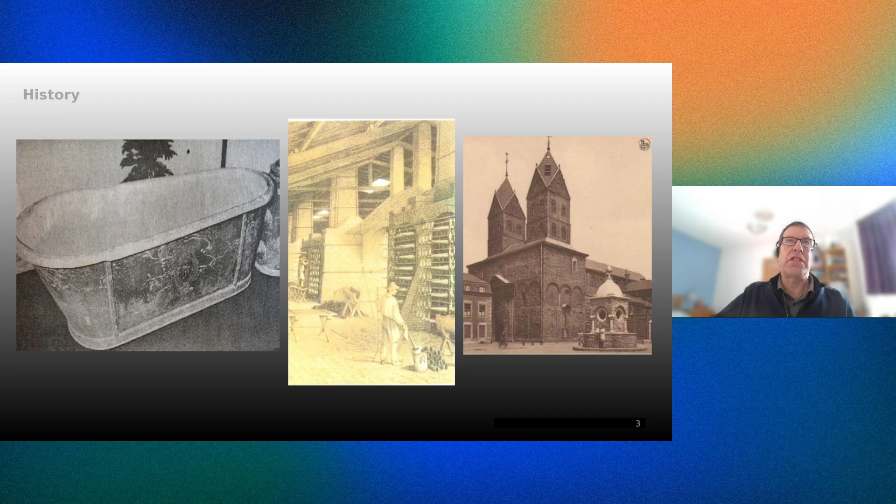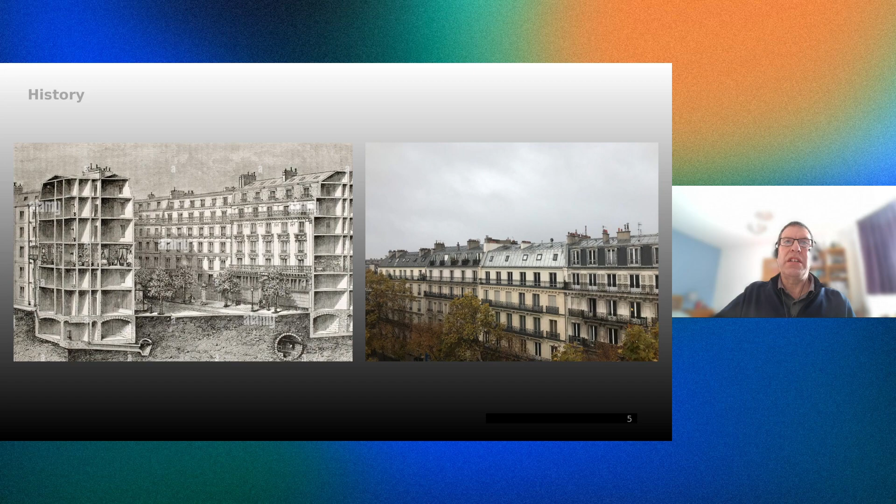On the left, you can see some of the drawings created at that time with the mansard roofs and grand boulevards. On the right is a picture actually taken last year. If you went to Paris in 1860 and you went now, you would see relatively little change. What we see and know of Paris in 2026 was really all built in the 1850s.

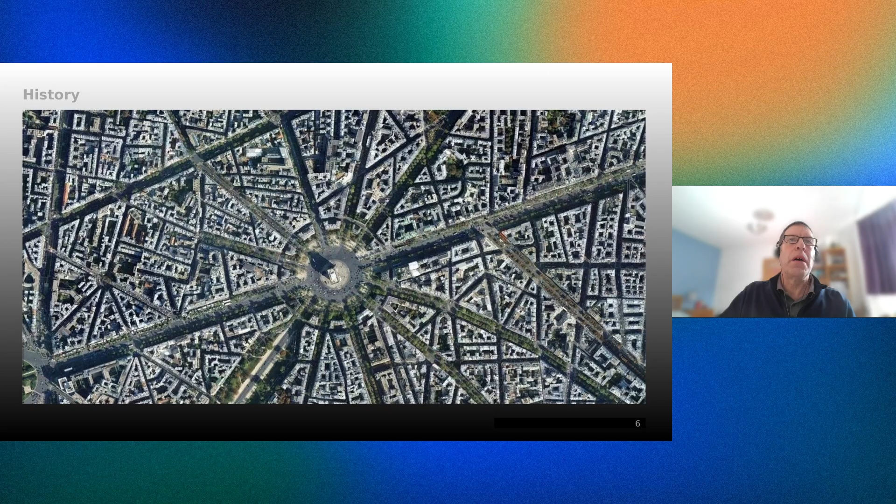This is a view from above of part of Paris—you might recognize it, that's the Arc de Triomphe and the Champs-Élysées. You can see there's a predominantly grey colour. That's because nearly all the roofs of central Paris are made from zinc, or at least have a significant amount of zinc on them, sometimes combined with slate. On the right is the Boulevard Haussmann, named after the town planner, and all those roofs are zinc.

I once went to Paris with a UK architect, and we were in this exact position—you can get to this place and look over Paris, from a shop called Galeries Lafayette. The architect said to me, 'I didn't realise there was so much lead used in Paris.' None of that is lead—all of that is zinc. A lot of it uses batten type systems, which we'll come to later, but all of it is zinc, sometimes combined with slate.

Some people ask, well, what's VMZINC? VM actually stands for Vieille Montagne, which means old mountain, the original mine where the zinc was coming from, now in modern day Belgium. That mine is long since shut, but the name of the company is VMZINC, and it was founded in 1837.

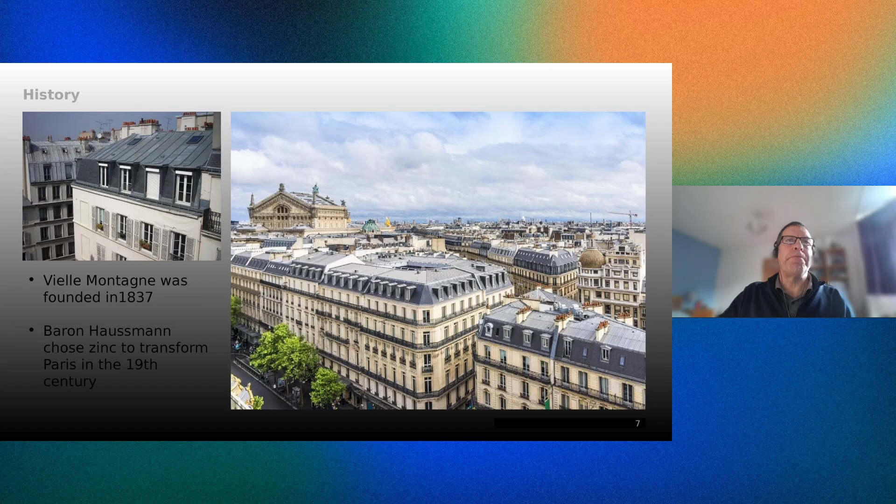This is something that happened in 2024. I'm sure everybody's heard of UNESCO. The zinc roofs of Paris weren't given UNESCO World Heritage status, but the skill of the zinc roofer and the zinc ornamentalist in Paris was given UNESCO World Heritage status. So the people that actually fit zinc have a UNESCO World Heritage status.

Whilst this is aimed more at Paris, I think all zinc roofers from all around the world can take a certain amount of pride in the fact that their skill has been recognized by UNESCO. And an awful lot of these projects, especially in Paris, are about retrofit.

The buildings aren't being demolished. They sometimes get slightly modified. Sometimes the roofs get improved insulation, and then zinc gets put on maybe after 70 or 80 or 90 years. We'll come to the durability in a minute. In fact, we're going to come to it now. So zinc lasts a very long time. Typically, the BRE give a service life of 100 years.

Now, zinc used to suffer from a little bit more corrosion, and you might ask why was that. Well, basically, the thing that really attacks zinc is SO2, acid rain. We have a number of environmental problems in the world today, but acid rain has actually been dramatically reduced over the years. So if you go back 40, 50, 60 years, corrosion rates for zinc were around 6, 7, or 8 microns per year. The thinnest sheet of zinc you'd use on a roof would be 700 microns, so it's still only 1% of the thickness per year, but it was significant. Today, we're down at 1 or 2 microns of corrosion per year for a 700 micron thick sheet of zinc. So corrosion rates have reduced dramatically.

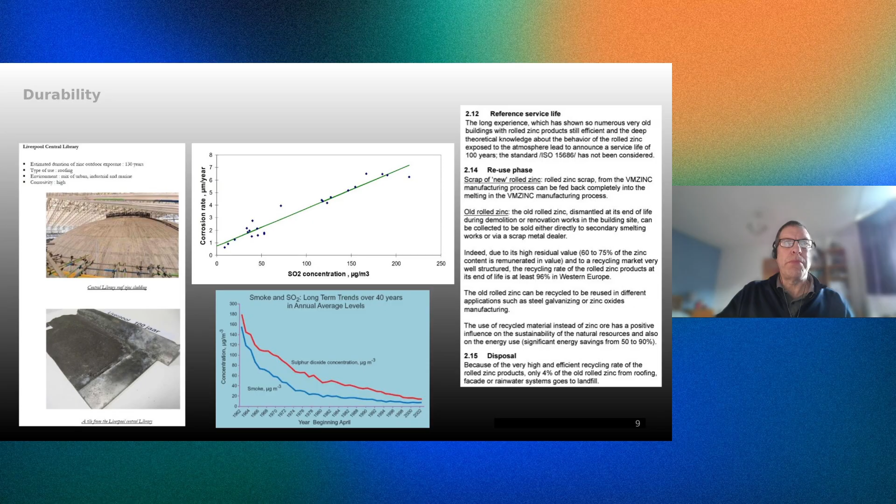This is a sort of first project to show you. It was done in 1879. This is Liverpool Central Library, which had a zinc roof installed in 1879, and it was replaced about 14 years ago with another zinc roof. Hopefully that's going to last into the 22nd century.

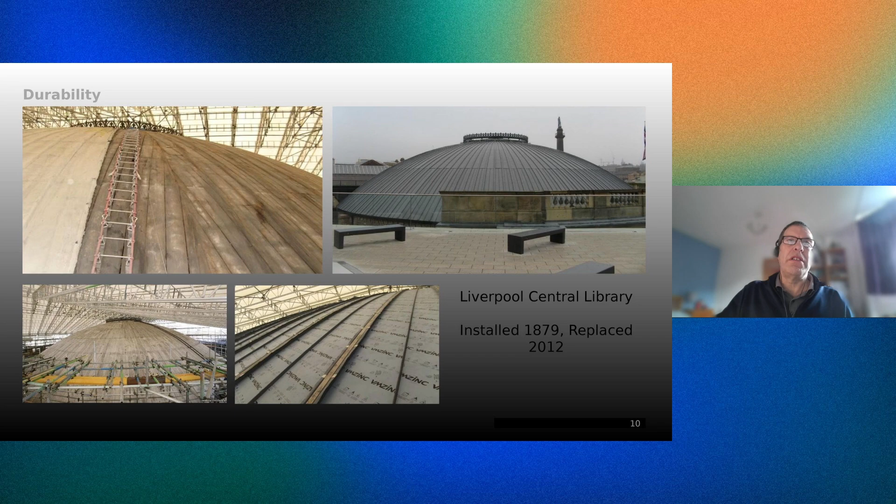Liverpool, when this was installed, was a pretty dirty place. A lot of acid rain by the coast, so a very aggressive environment. But the zinc did last 130 years. You can see on the left the Picton Reading Room, which is a beautiful space, and that's where the zinc covers that area.

There were some slight modifications made. English Heritage wanted it to go back exactly as it was done in the 19th century. Panel widths have been slightly reduced - there were less rules then, slightly more rules now. So we didn't recommend the 800 millimeter wide panels; we recommend they be reduced a little bit. Between the batten caps, we've added a standing seam, just to make it even more secure than when it was done originally, although that roof did last, as I say, 130 years.

I've mentioned zinc a few times. What we're using here is basically 100% zinc. It is not galvanized steel, it's not coated, it's zinc all the way through. However, we do add, for about every ton, 1,000 kilos of zinc, about 1 kilo of titanium and copper, and that slightly increases the tensile strength.

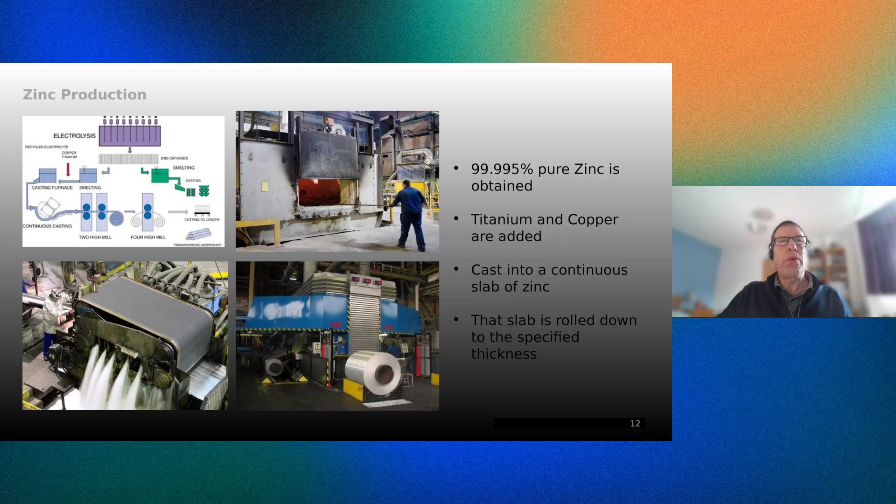The process involves putting the zinc and that tiny bit of titanium and copper in a big oven, and it comes out as molten liquid, then it goes into the machine in the bottom left, which is called a Hazelett machine, and it comes out as a slab of zinc. Then that gets rolled down to the thickness required, which is typically 0.7 for a roof, and then it can go up to 1.5 millimeter thick zinc for rain screen cassette panels.

Whilst zinc is refined, it does need energy. A lot of zinc is produced through electrolysis, and that's done at room temperature, so the energy requirements are a little bit lower than other metals, which is obviously good.

And zinc is never thrown away. About 96% of zinc is old zinc that is then reused. There's a very efficient recycling system for zinc. Now, some of it might go to being used for a zinc roof or a zinc wall, but other uses are brass, galvanizing, zinc oxide, zinc for skin cream. Zinc is an essential element. It's not toxic like lead, so you can put zinc on your skin. In fact, it's good for you.

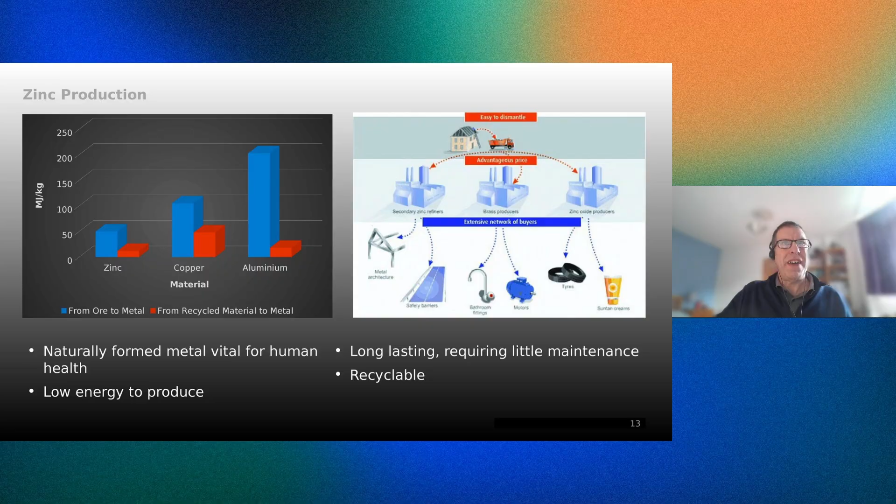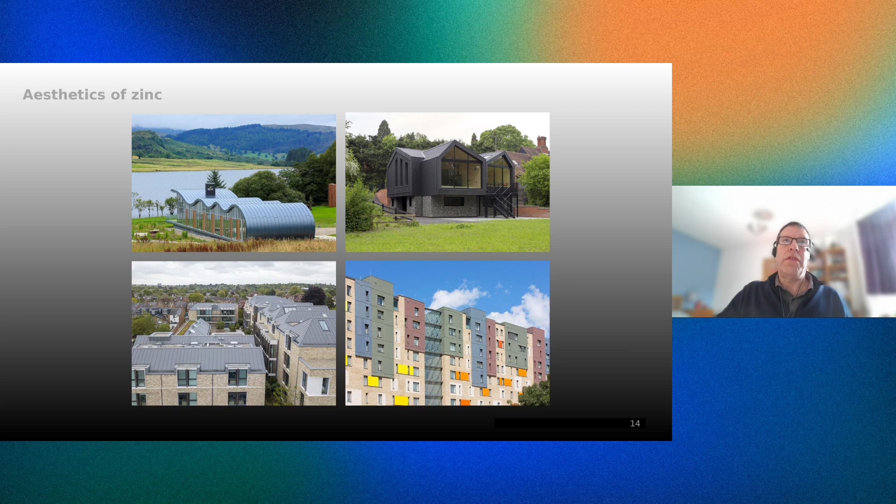A little bit about the aesthetics. This is one of the real reasons why zinc's used. It's an attractive metal. It's not a painted metal. It just has the beauty of zinc, whether that be for retrofit or new build.

You can use mill finish zinc, pre-weathered zinc, or even engrave zinc. There's a number of options to slightly modify the surface, but it is still absolutely solid zinc.

Natural zinc will form a patina, which will go to a middle sort of battleship grey, but it will take a number of years to create a completely uniform patina. So after a few months or maybe even a year or two, it might be a little bit uneven, which might be fine for some clients, but not for others.

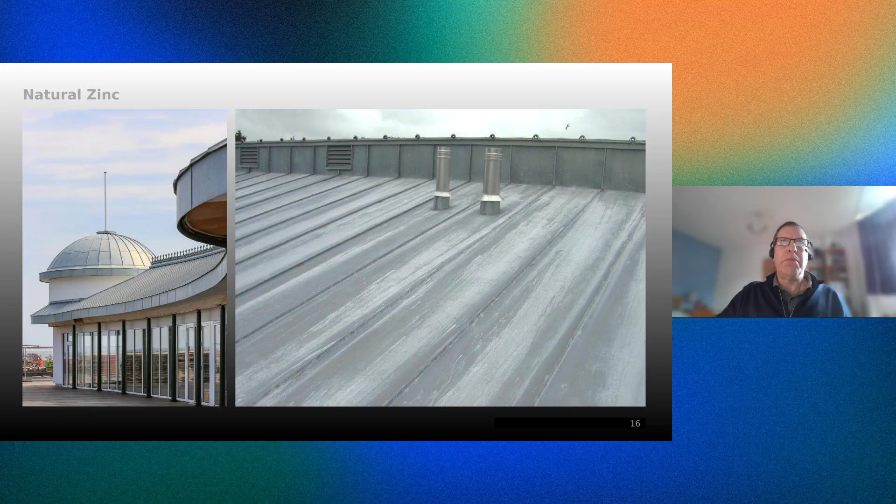And that's where we have the pre-weathered quartz zinc, which is basically doing what nature does, but from day one. So it's this middle grey from the beginning. All this can be used, whether it be roofs or walls, or as you can see there, rainwater systems. The quartz zinc can be used for that.

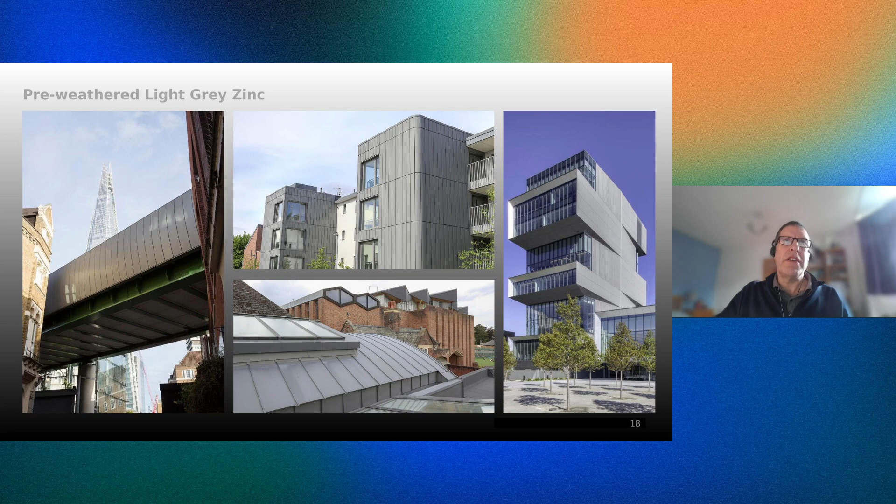Here's a few examples. There's Borough Viaduct with the Shard behind it. In the middle, top, is actually some housing in Dublin - that's a renovation using rain screen panels. A school in Stockport that was extended, so a large extension. And on the right, a university building in Chicago over in the US.

The first pre-weathered zinc that we produced was Anthrazinc, which has a very similar aspect to slate, and that was first produced in 1979. So it's been around for almost 50 years now, and it was originally used as a flashing material for slate.

Installers used to paint the zinc because clients didn't like the shininess of it. The problem with painting zinc in situ is that the paint peels off, doesn't look great. Architects asked us, could we pre-weather zinc? And we came up with this in 1979, initially as a material just to be used with slate, flashings, gutters, and that sort of thing. But over the years, it's become a material in its own right for roofs and walls.

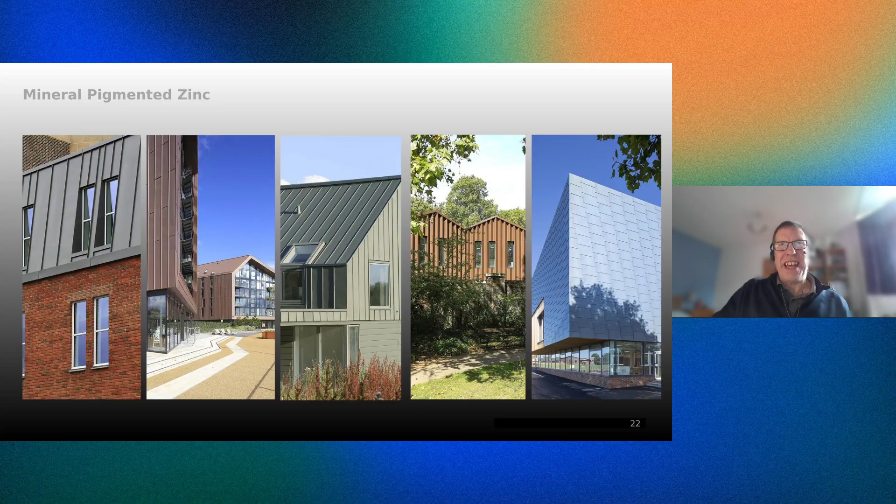Then there's Pigmento, which is zinc that has a mineral pigment added to the pre-weathering. It's a little bit like looking at zinc through tinted glasses - you can still see the texture of the zinc. They're not bright, vibrant colors, they're fairly discreet. And you can use them for all the systems, whether it be roofing, wall cladding, standing seam, rain screen - it doesn't really matter. All of those are possible in the Pigmento range.

This is a project done over 10 years ago, Godson Street near King's Cross, Islington. It's very accessible and shows zinc that's been up for a number of years in lots of finishes. So if you are in London and want to see zinc in lots of finishes all at once, this is a good place to go and have a look.

And we're always extending the finishes. This is the same principle, slightly darker, so dark zinc with a very slight red colour and with a very slight blue colour. We've even done bespoke colours - this is on Oxford Street in central London.

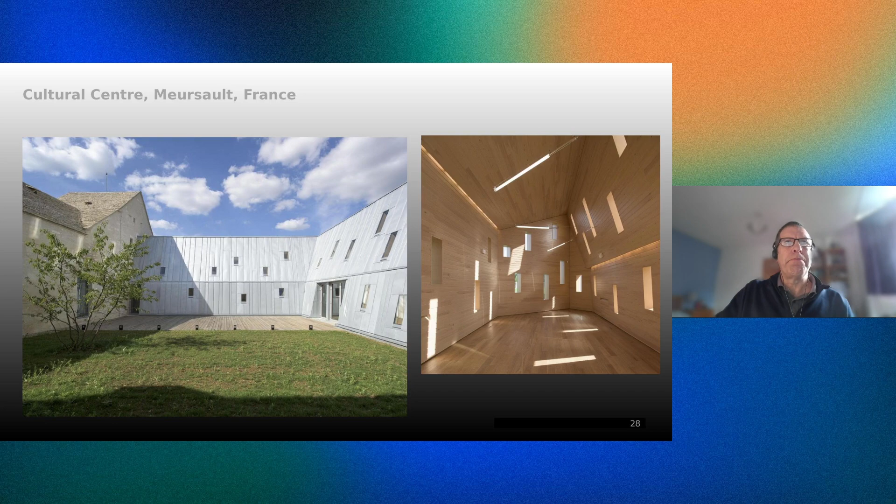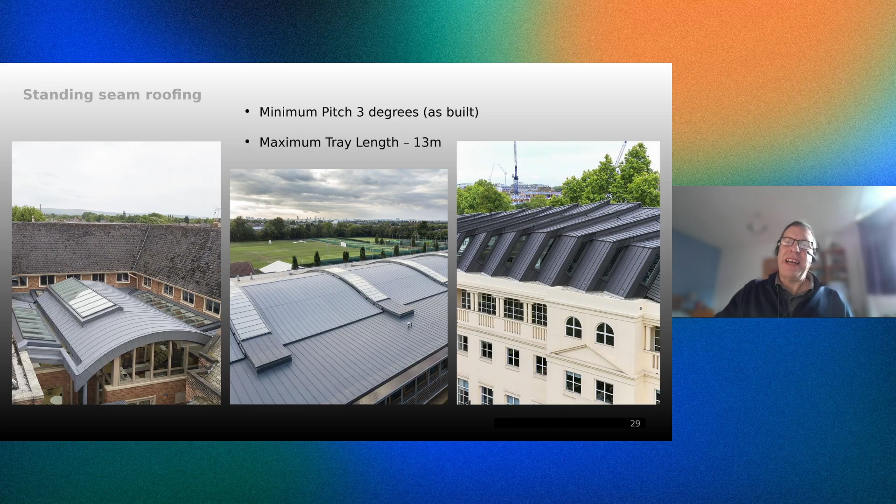So zinc can be used for roofs and walls. Standing seam is really what's mostly used for roofs. We did mention batten cap. There is a minimum slope of 3 degrees and a maximum length of about 13 meters. Metal, including zinc, expands and contracts, and beyond 13 meters that gets difficult to manage.

Talking about standing seam, we're talking about a 25 millimeter standing seam. It's a fairly discrete seam - not an industrial sort of rib. It doesn't have stiffeners, so it's quite a discreet panel.

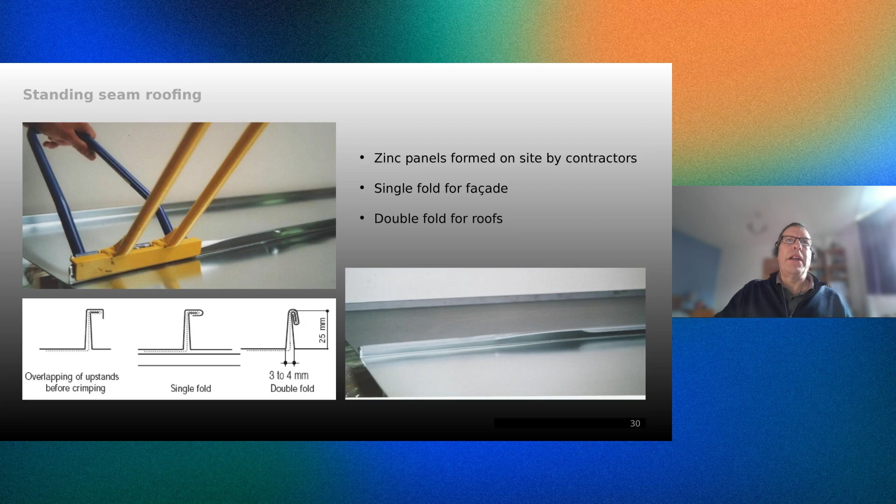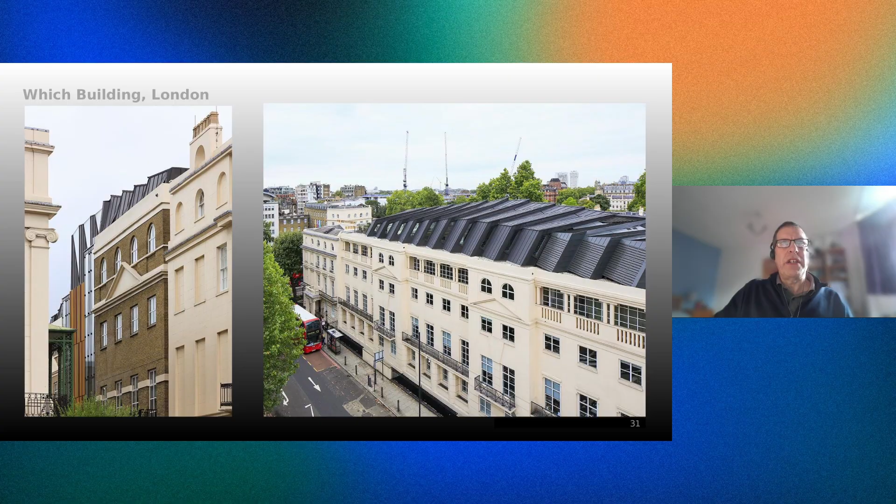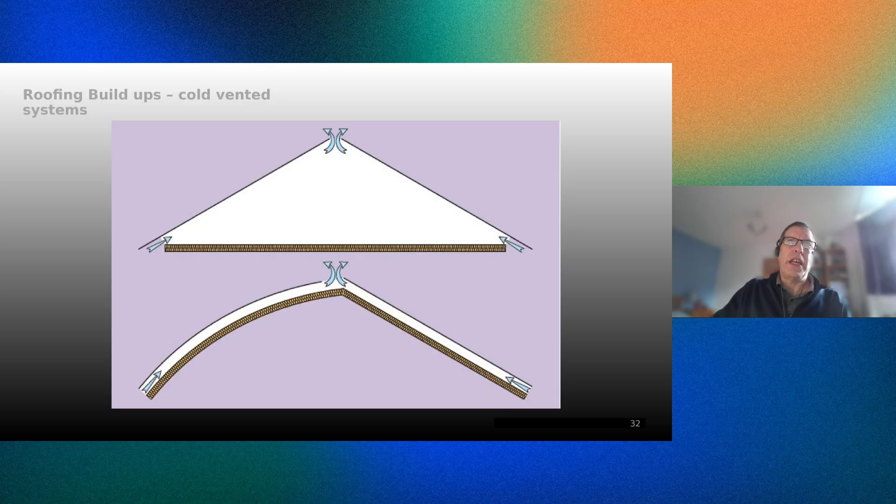Just a word on build-ups. Both cold roofs and, as you're going to see, warm roofs are possible in zinc. Cold roofs are where the exterior skin is vented - there's a space between the insulation and the exterior skin, whether that be at roof level or loft level. It doesn't matter. These are vented roofs, and that's typically the build-up.

You'll see there'll be zinc sitting on quite often timber. There are other options with a vented cavity underneath. The vented cavity is not to deal with water ingress from the outside - it's to deal with condensation from the inside.

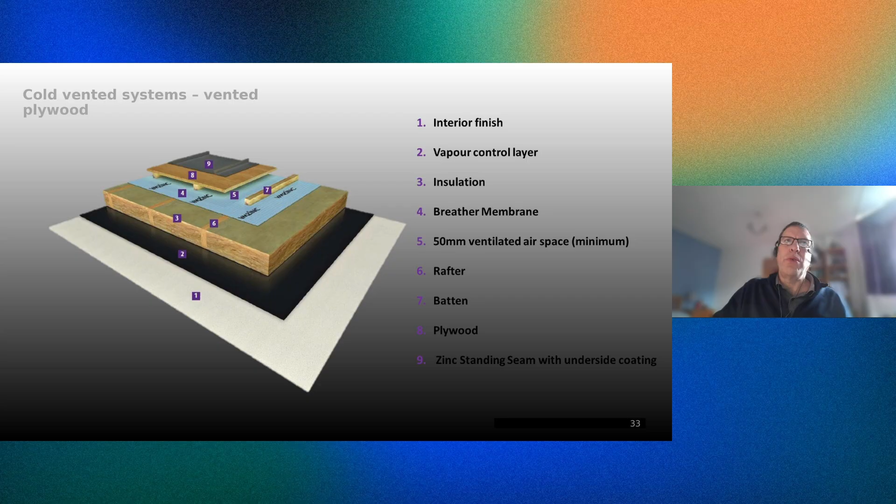And a warm roof is possible. This is where you have your insulation above the structure, hence the term warm roof. Typically the zinc is sitting on insulation. So you'll have your structure, then a vapor barrier, which is absolutely fundamental.

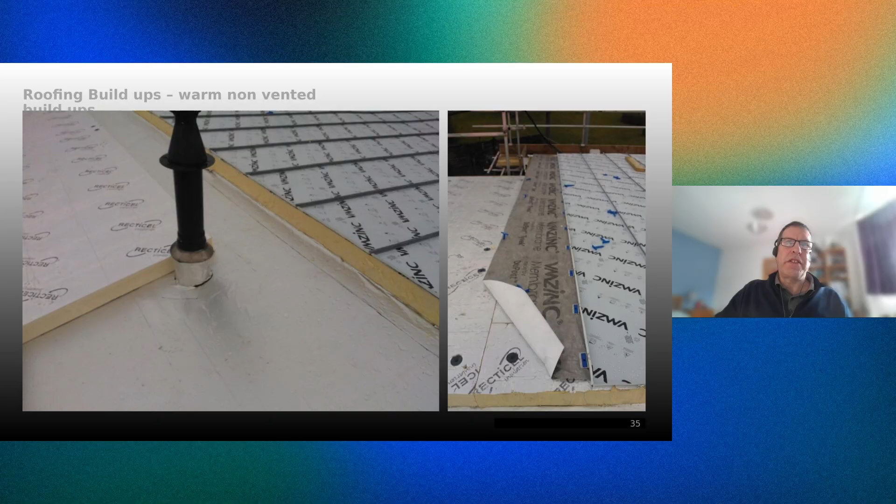It has to be an aluminium bitumen backed vapor barrier, not a VCL, not a polythene film, then insulation, breather membrane, and then bearing plates - stainless steel bearing plates with the pegs that go through and fix the zinc back to the structure below with a very limited thermal bridge. There's a number of options, including ones that have a BBA certificate.

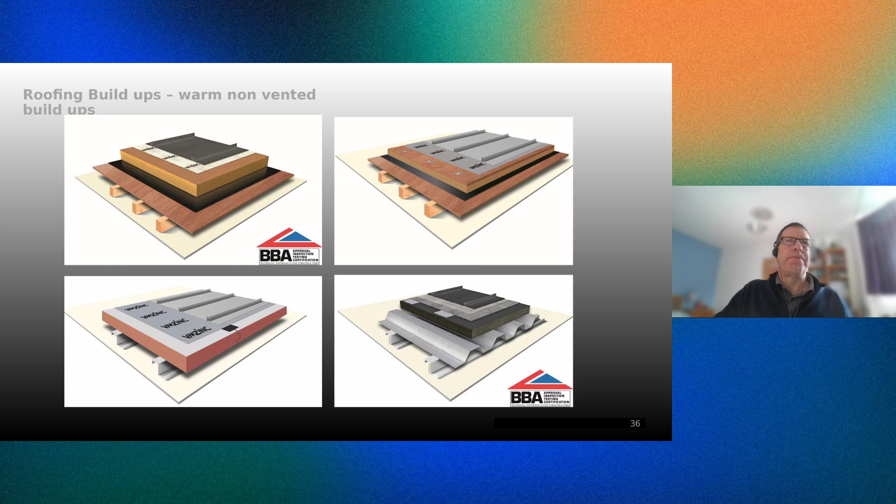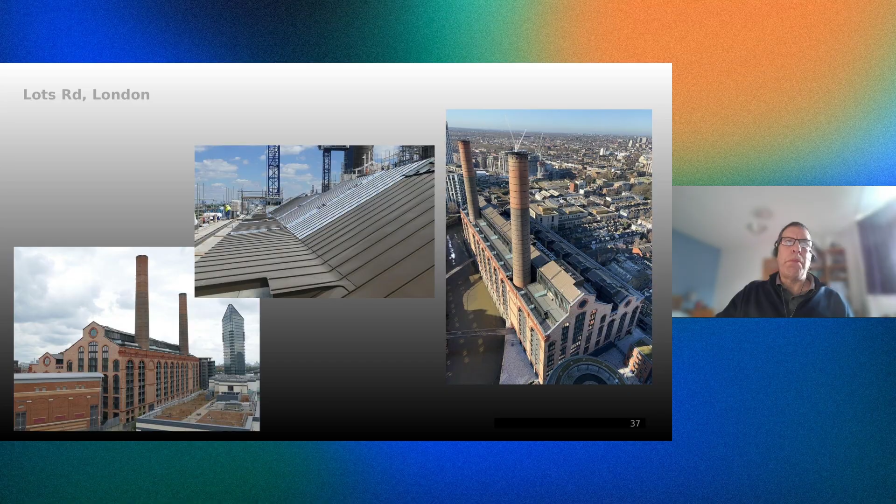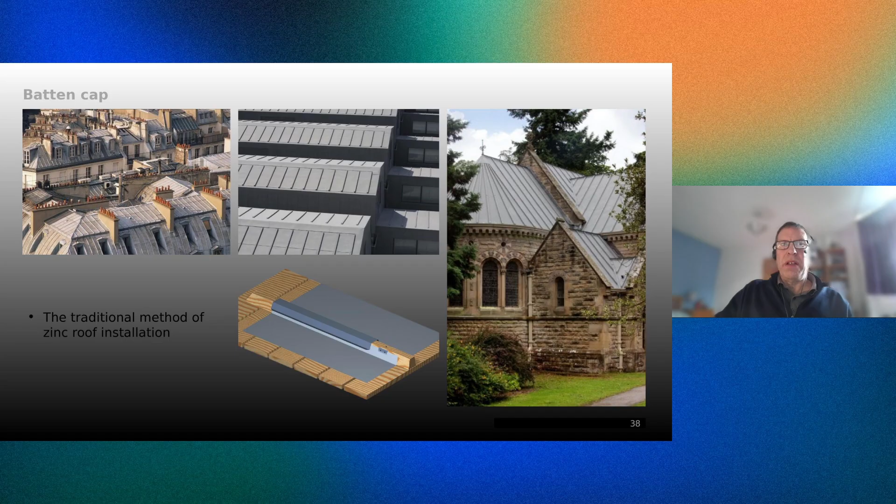I mentioned batten cap a few times. On the right is an old church that was re-roofed with a zinc batten cap roof, near Shrewsbury. A batten cap is very similar to a lead roll, so it's a U panel with a timber batten and then a flashing over the top.

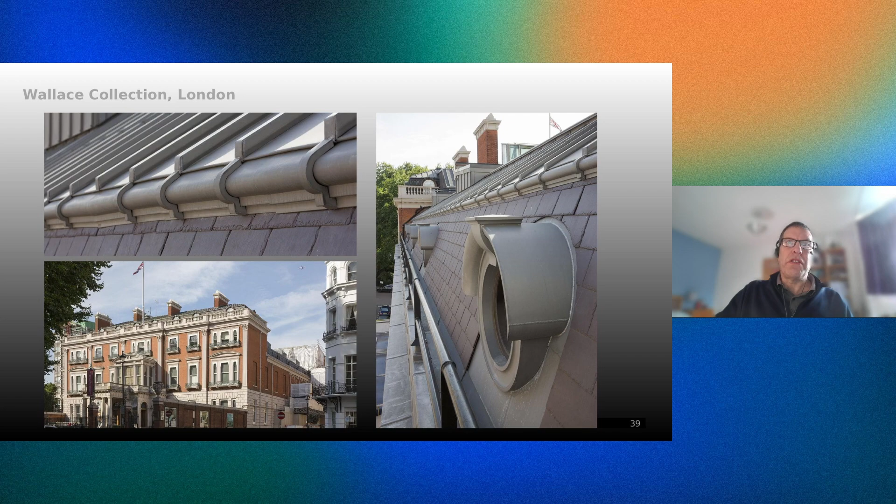This is the Wallace Collection in West London. Again, quite an old building, combined a little in the Parisian style - a mansard in slate and then a batten cap zinc roof on top, with ornaments in zinc, and you can see the bullseye window there in the quartz zinc.

Oops, sorry, jumped for a bit quick. Just going to go back to where I was. Right, so just moving forward now.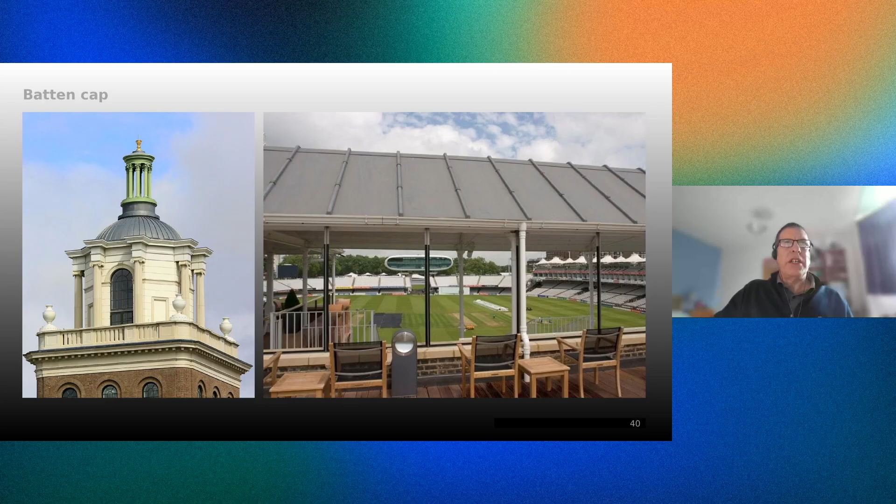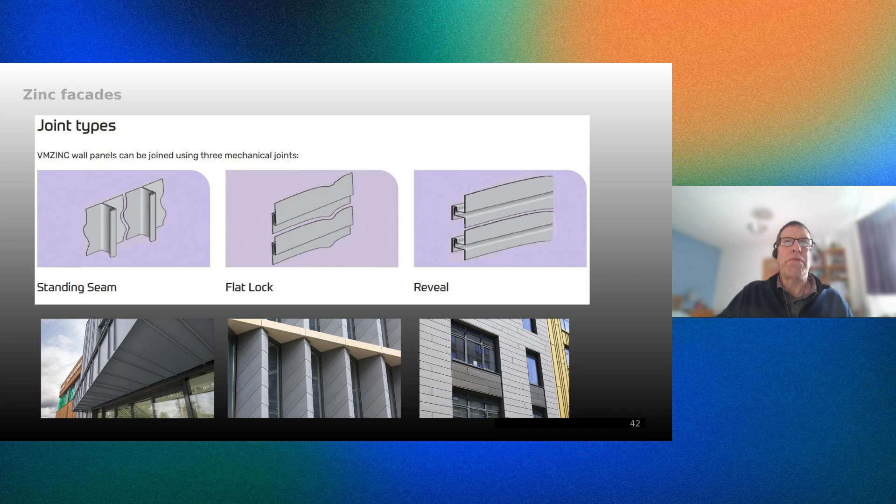Now on facades, there are lots more options of panels, including rain screen panels. Standing seam facade isn't a rain screen, but there are rain screen options. Typically you'll have three types of joint: the standing seam on the left, a flat lock type joint with two hems locked together, and some sort of reveal type joint, more commonly used with rain screen. The standing seam on a wall is really a roof on a wall, and that can be fitted to plywood.

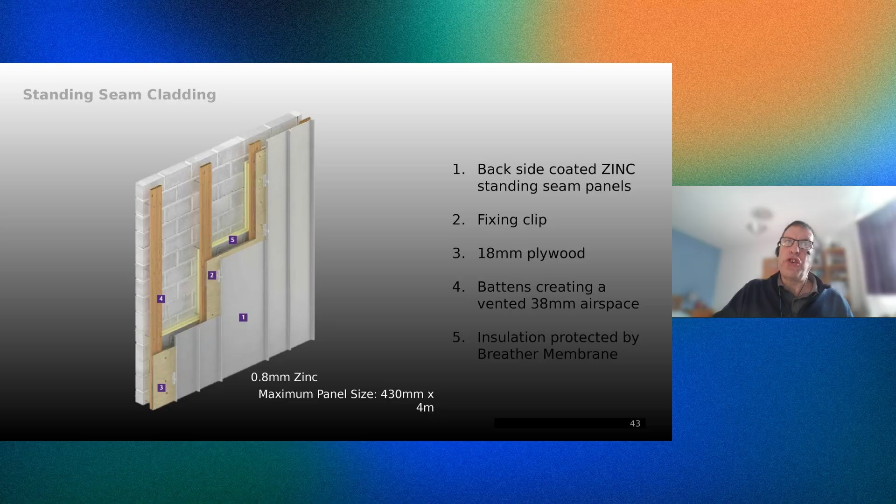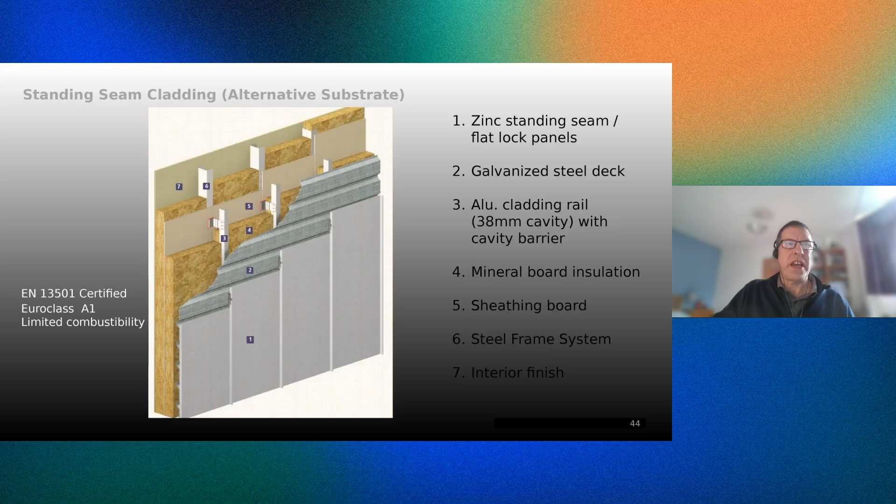The zinc itself is A1. All finishes are non-combustible A1, but it is possible to replace the plywood with a steel deck, taking anything combustible out, using maybe only A1 and A2 materials, but the zinc itself is A1. There's an image showing the steel deck before the zinc's applied. Obviously, zinc and galvanized steel are completely compatible, since galvanized steel is just steel covered with zinc, so there's no compatibility issues there.

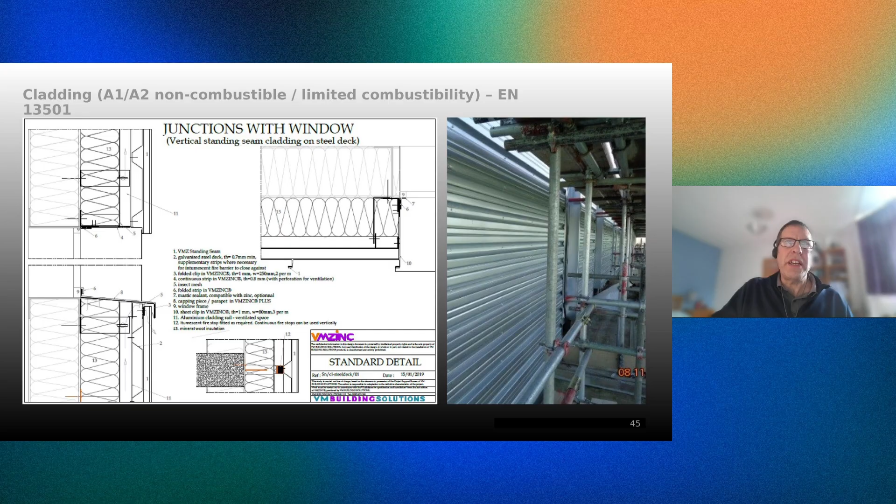As far as widths are concerned, maximum 600, that's really for roofing, and 430 for more wall cladding, but you can play on panel widths, as we've seen on other projects, to give the facade even more texture.

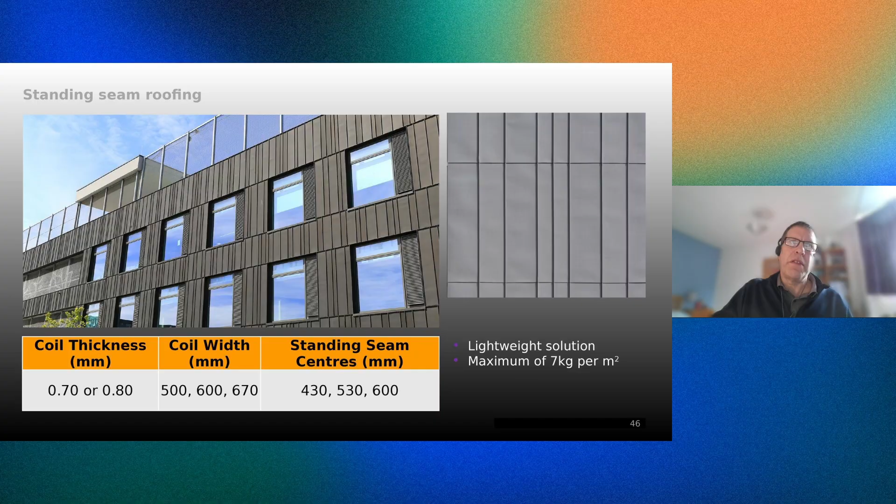And the flat lock panels, as I said, are really just panels with 25mm hems that are locked together, and that can be rectangular, diamond shaped, square, but they're all essentially flat lock panels.

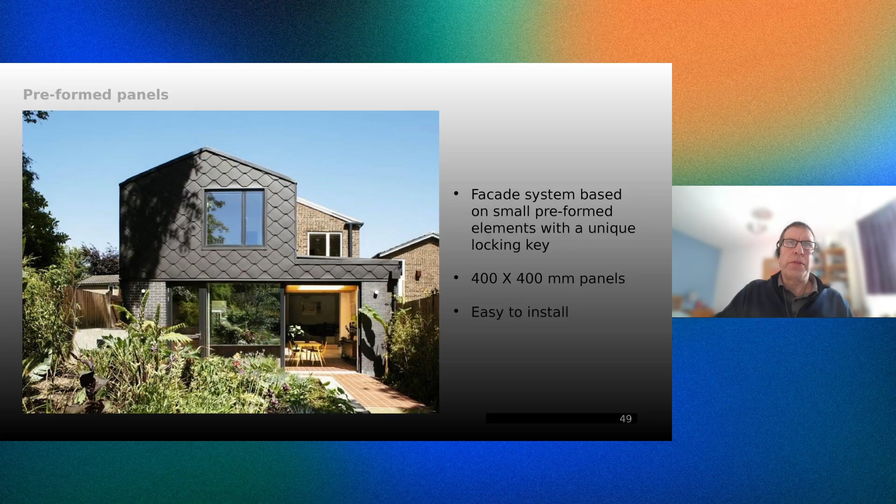This is a stamped shingle called Attica, and here there's an extension being done on a domestic property, creating quite an elegant extension.

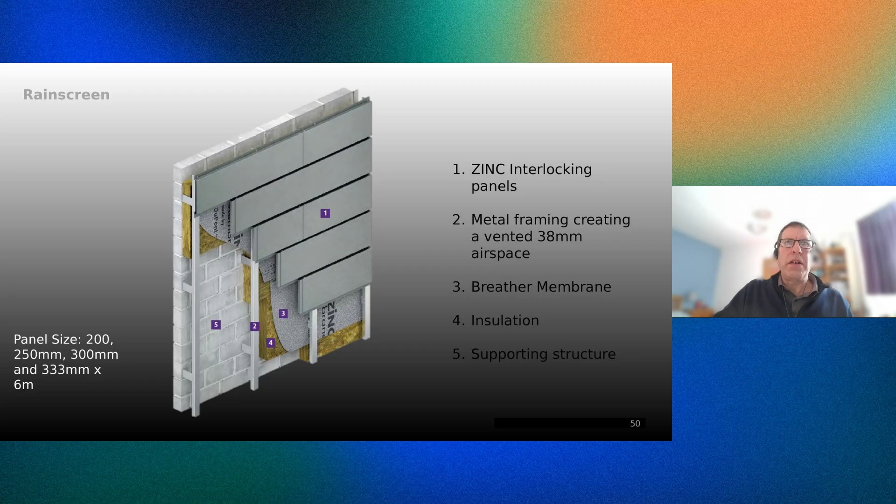I've mentioned rain screen a few times. Rain screen is really where water can ingress through the panels, which is fine - there's a cavity and it can drain out at the bottom. The interlocking panel is probably the most commonly used rain screen panel.

Sine wave - obviously we haven't invented sine wave or corrugated, it's just corrugated zinc. This is one of the few systems where you actually fasten through the zinc and the fastener's visible, so it's absolutely fundamental that's a stainless steel fastener.

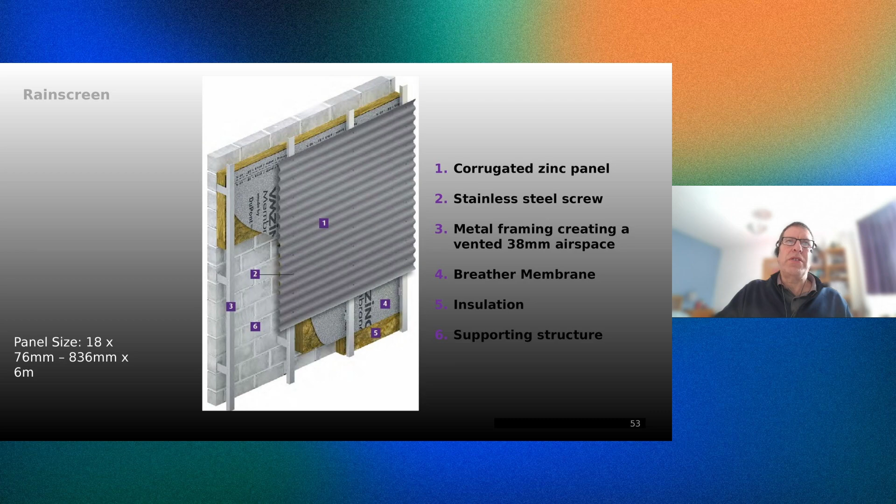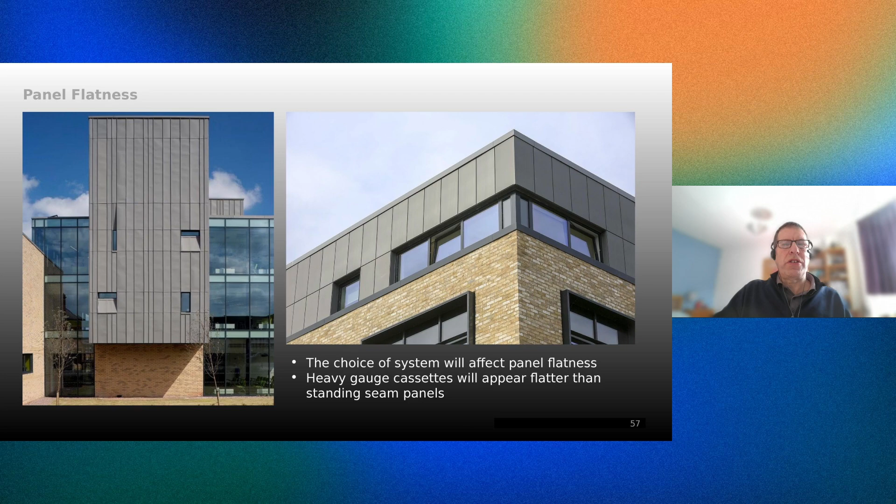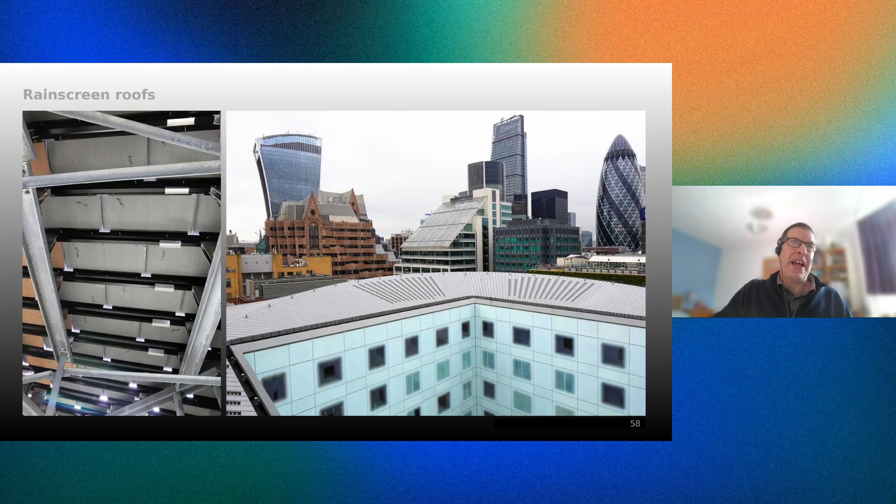This is the Port Authority building in London. Again, this photo was taken a few years ago because a view of a few towers have since been added to that view between the walkie-talkie, the gherkin, and the cheese grater. This was an old Port Authority building - I think it's a hotel now - and a rain screen roof was created on the top.

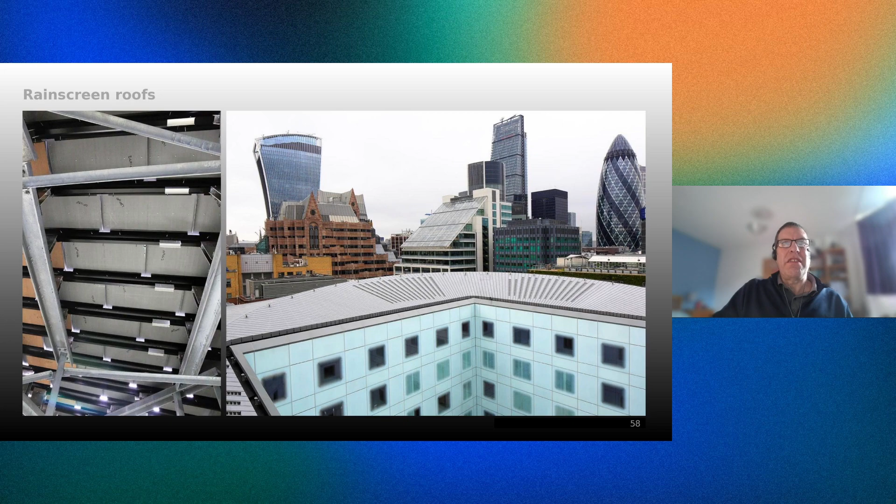A rain screen roof means that the water can penetrate through, and on the left there all those black lines are effectively gutters. So it's quite a complicated roof, but it's quite interesting.

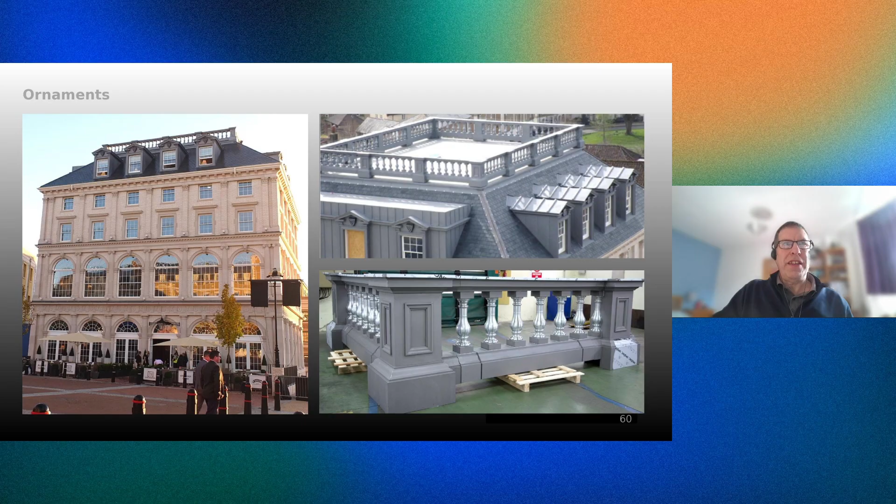Mentioned weight earlier - this is Poundbury. I won't get into the pros and cons of Poundbury, but the project does show a balcony balustrade, which was initially going to be stone, but when the architects were looking at doing the dormers in zinc, they saw that we could do quite a lot of interesting things with zinc as far as folding it, spinning it, soldering it, and create a balcony. The advantage of the zinc is it's far, far lighter, making quite a significant saving on the roof structure.

And zinc gutters - sometimes we see projects with a lovely zinc roof and then a PVC gutter, which is a little bit sad. You can use the same gutters, whether they be half round, rectangular, or internal gutters, with all the accessories, the end caps, the elbows, and so on and so forth.

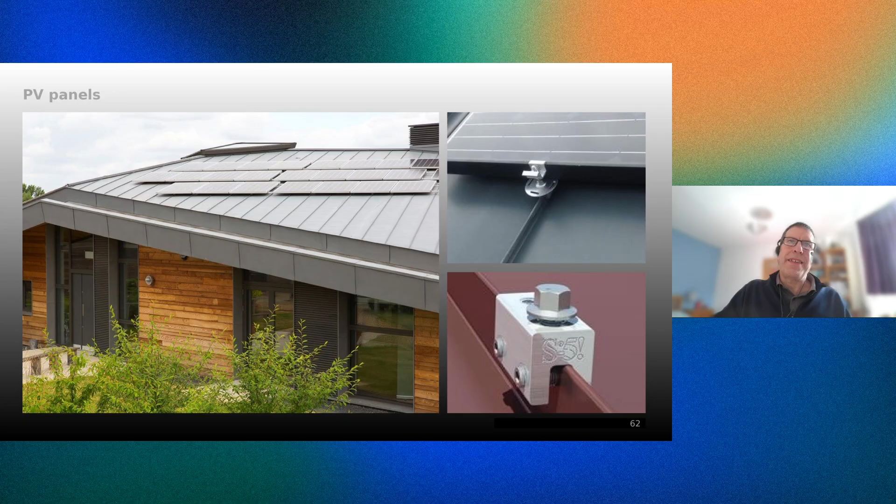And it's possible to clamp on PV panels. This can obviously be done on retrofit, but also on new build. Panels can be adhered to the zinc. The clamp-on system maybe makes it easier to add and to remove. The only issue is we do need to look at the shear stress. If you're clamping something onto the standing seam, you need to make sure that standing seam is not being put under too much load, and that's something that we can look at for you.

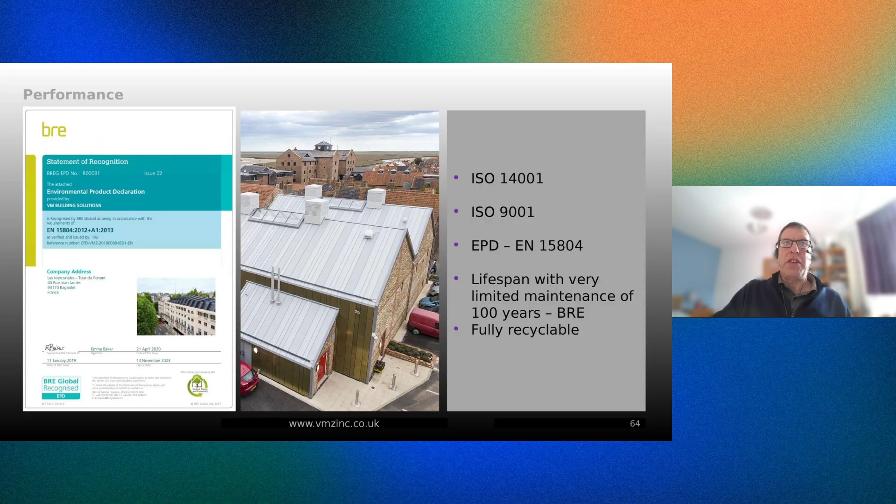As far as certification goes, plants are ISO. We also have EPDs for all the finishes, and as I mentioned earlier, the BRE state a lifespan of 100 years with limited maintenance, and it is fully recyclable. We've also done a number of BROOFt4 tests showing no flame penetration or spread, and as I said, the material itself is A1.

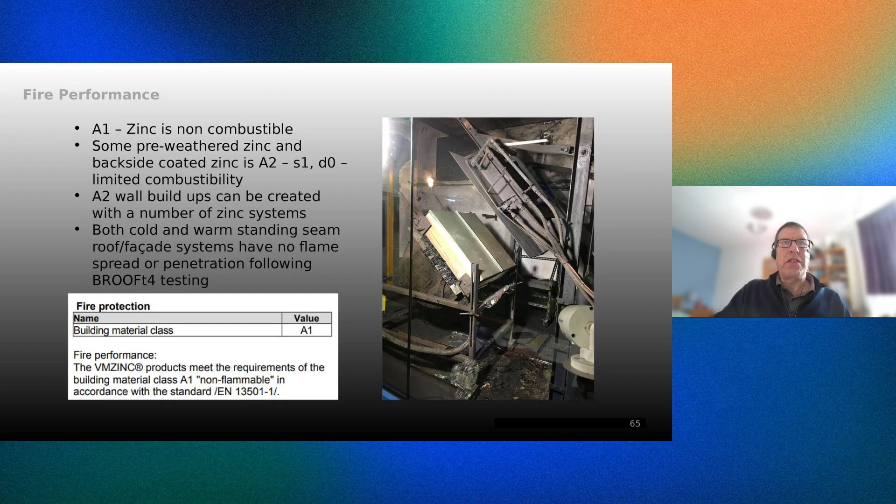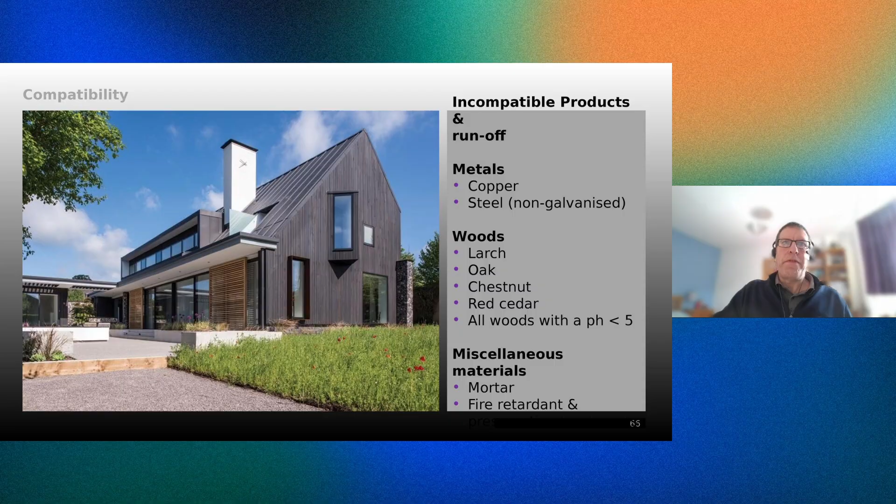Zinc is not compatible with everything. As far as metal is concerned, the big thing to avoid is copper. If copper's beneath the zinc, there's not a problem. Some very acidic timbers can stain zinc - again, if they're beneath the zinc, it's not a problem. So if you are doing something where other materials have been used and the water's going to run across the material onto the zinc, maybe have a chat with us and we'll let you know if it's going to be okay.

This is not a retrofit, but it's an interesting project, or two projects, both in New Orleans. This is going back to 2005 and the Katrina disaster, where there was a significant hurricane and flooding. The panels on the left are interlocking panels, which had pretty much no damage at all. On the right, standing seam - you can see that the windows have been blown out and the flat roof has been peeled off, but the zinc resisted extremely well. So it actually has been hurricane tested.

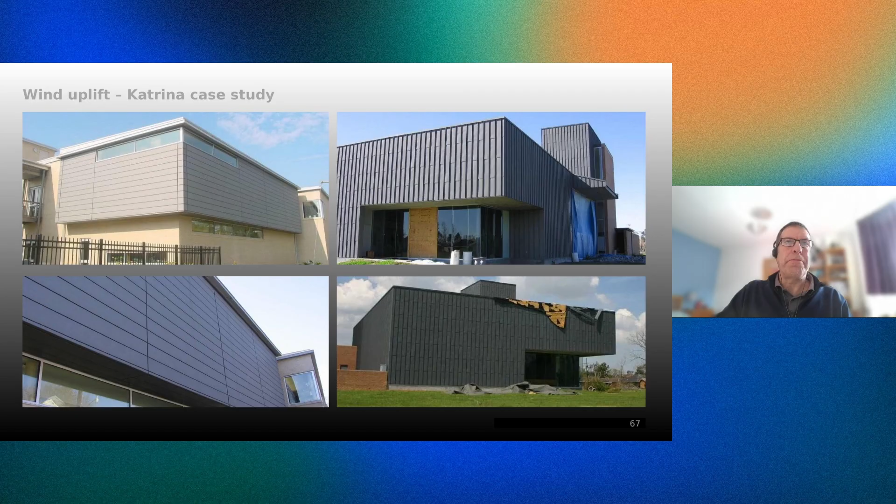All of the zinc that we sell in the UK is made in France, but it's stocked in the UK, so it is available. Price does depend on complexity, the nature of the project, the size of the project, the location, and a number of things, but sort of between 125 and 225 pounds a square meter supplied and fitted is what you'd expect. Now that means the panels, the installation, not the substrate - so not the insulation and the timber or metal - but the zinc panels supplied and fitted, sort of between 125 and 225 pounds a square meter, but it will vary depending on project.

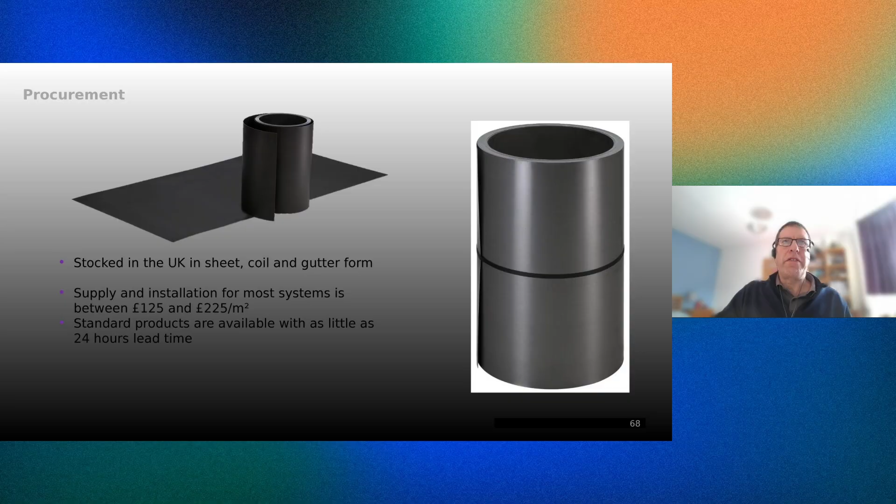James mentioned the importance of installers. Zinc standing seam and facades shouldn't be installed by general builders. There is a network of installers around the country, and in particular VMZINC At Work partners, of which there are 65 across the country. These companies understand all our recommendations, the nature of the flashings, the build-ups, cold roof, warm roof, panel size, and they can also offer a 50-year material warranty on the projects.

I mentioned UNESCO. I think it's important to stress that we sometimes criticise trades in the UK, saying they're not as good as Germany, Switzerland or France. There are undoubtedly people doing things they shouldn't be doing, but there are also very competent, well-trained companies that spend time and money on apprenticeships. So there are some excellent companies.

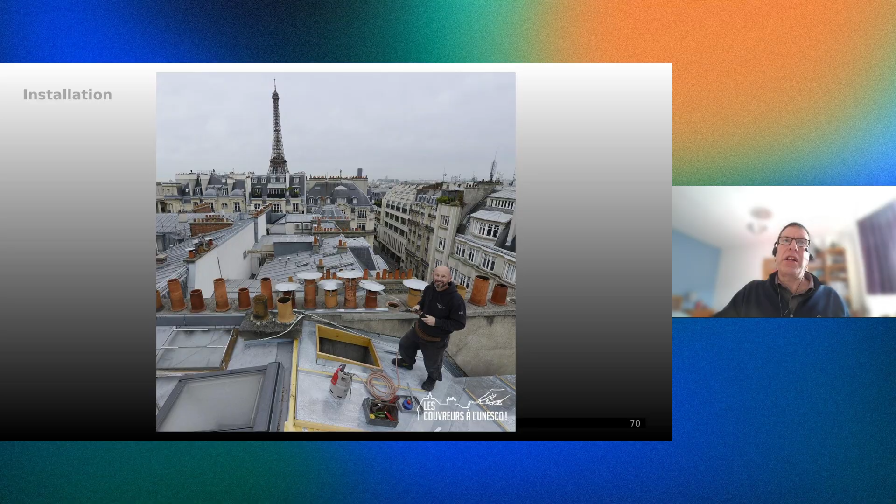As I said, we have a list of 65 companies across the UK and indeed Ireland, VMZINC at Work. We have a further 65 or 70, so getting up to about 140 companies in total. The other ones are recognised, so they also have knowledge of fitting VMZINC.

Going back to the biggest retrofit, Paris. If you watched the Olympics back in 2024, a lot of the events had a backdrop of Paris, and therefore you would have seen lots of zinc, whether it be the quayside of the Seine or a high level view. You would have been looking at lots of zinc in those images.

We can supply a lot of information, whether it be literature, samples, NBS specifications, BIM. We have a large library of CAD drawings, and obviously we can do face-to-face discussions about specific projects. That's something we're very happy to organise. So please let us know, contact us if you want us to talk about a specific project.

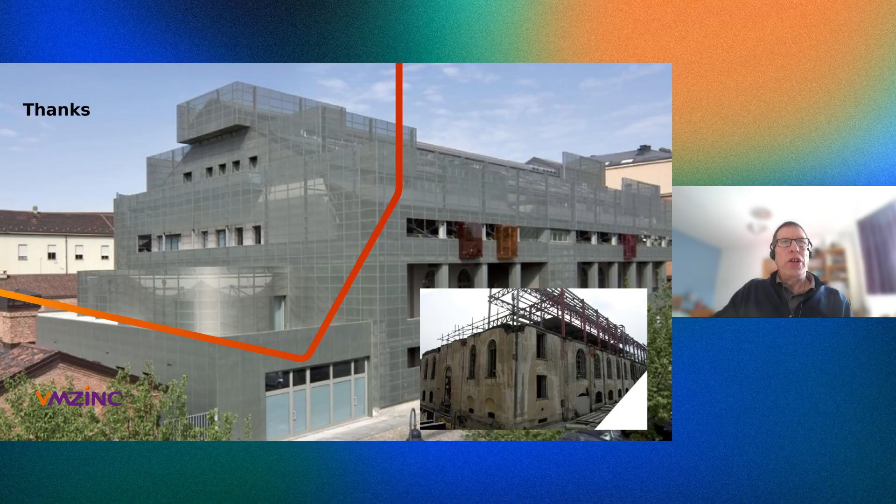That's a project, actually, an old army barracks in Turin that, as you can see on the bottom right, was a little bit the worse for wear, and it was massively renovated, and then around the whole of the building, a perforated screen was installed using zinc to give it an ethereal type feel, take away the image of a barracks. The nice thing about zinc is when you perforate it, you're just exposing more zinc, not exposing anything else. It's just zinc. So that's pretty much finished.

But before I go, I do want to mention that for the last 2 years, we've been able to offer copper. Now copper and zinc, as I mentioned, don't actually get on with each other as far as compatibility, but they are designed and installed in very similar ways. Copper's red, zinc's grey, but the techniques and systems are almost identical. So what you can do in copper and what you can do with zinc are very similar. And as with zinc, there's a number of pre-weathering treatments we can do with copper, including artificially creating copper that looks green.

Right, that's it from me. I'm going to hand back to James for hopefully a few questions. Thank you very much.

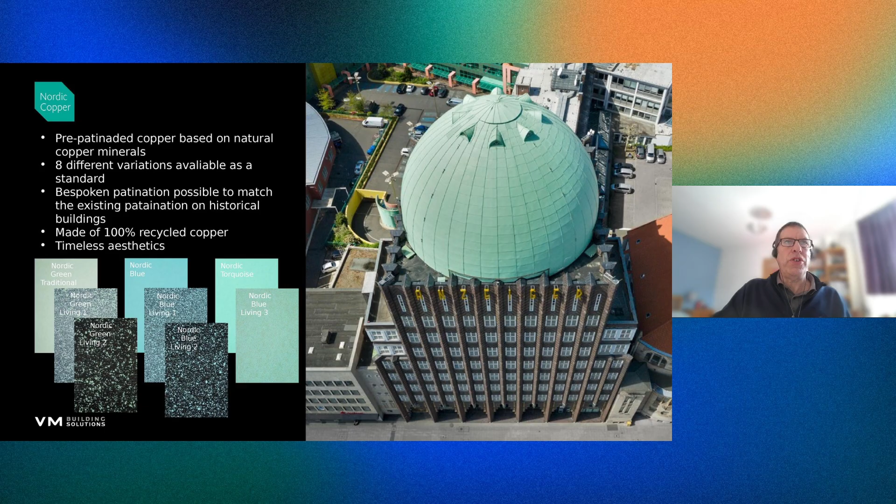Thank you so much, John. What a great, elegant, understated material zinc is, eh? Very popular with architects, as we know, or many.

It's interesting you've moved into some new shades there with the copper side of things, but we're going to stick to zinc, and we've got some practical questions which have come in, which is very helpful. You have talked about roof build-ups, and also what zinc's not compatible with. But we've got a question from Ken, who asks, what is the recommended makeup for a modern, highly insulated roof/wall construction, and that's maybe not something you want to put your name to legally. But do you have any thoughts on a recommended modern highly insulated wall?

Well, I think it's an absolutely fair question. The traditional way of installing zinc, and it would be with copper and lots of metals, is on a timber ventilated deck. That's what's been done for 200 or 300 or more years, and that still works extremely well. There's absolutely no problem with doing that at all.

But over the last, I'd say since the mid '90s, we started getting involved in warm roofs in about 1995, so over 30 years ago, and they've become more and more popular. Mainly because you reduce thermal bridges, you can have a much better U value, with insulation above the rafters.